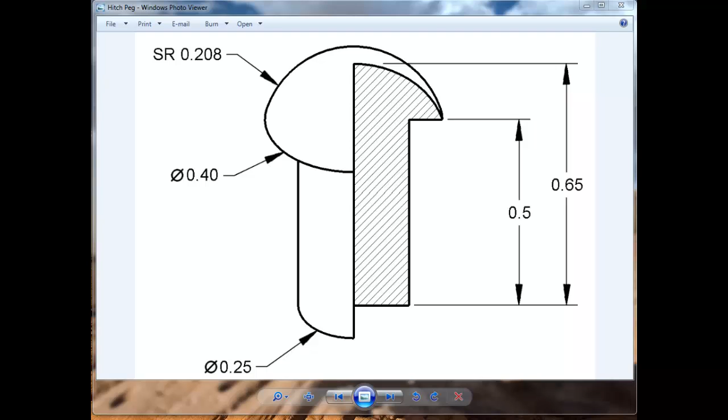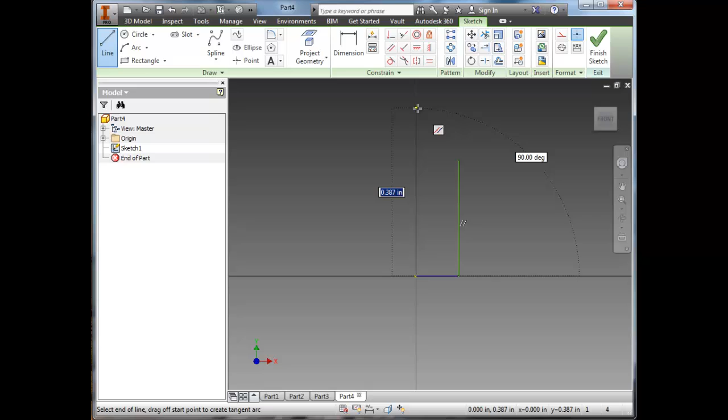The way I'm going to make this is just filling in the information that I do have. So I'm going to go into Inventor. Oh, got to make a new one. And I'll create a new sketch on one of the sides. It doesn't really matter which one because it's going to be round. And I'm going to fill in the information that I do know, which isn't that much. I know that there's some shape like that.

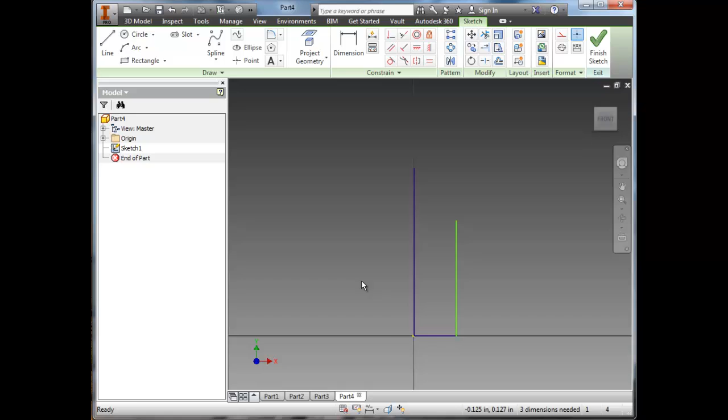I'm told that it's 0.5. These measurements, any height measurements won't be halved, but I have to only take half of this bottom diameter because I'm only drawing half of that circle and also of this one. So I have, at the bottom, I'm going to do 0.25 divided by 2.

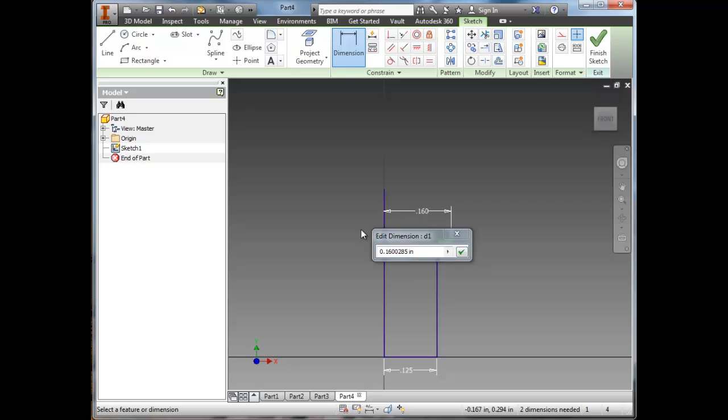And then I'm going to extend a line out here because the distance from here to here is, that's this diameter, is 0.4. So this distance should be 0.2. The height here is 0.5. And the height at the top is 0.65.

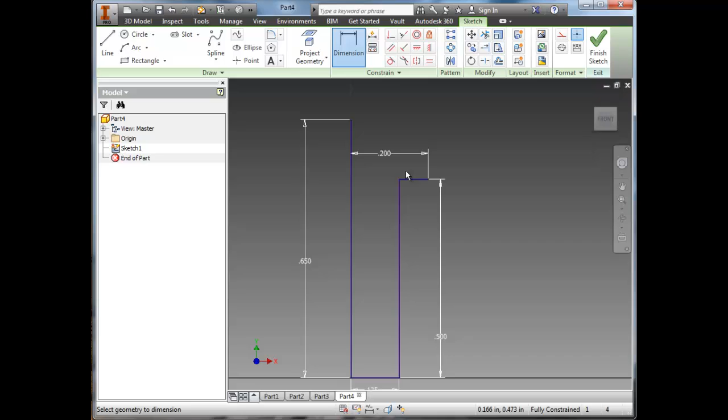So I haven't even dealt with my arc yet. I'm just trying to get all the other pieces in place. Because now I can come in with my arc tool. And then put in my spherical radius of 0.208.

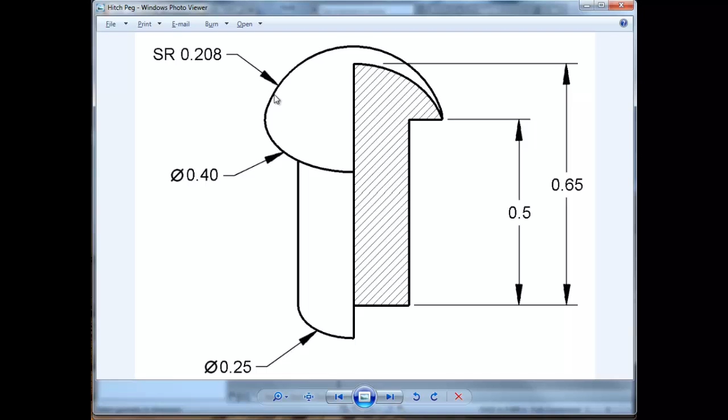And one thing that I should check, at the center, if I want to make sure that the top of these pegs is perfectly round, that means it has to be tangent to a line that's here. So I'm going to draw an extra line right there, which is super hard to see. I'm going to delete this. I have this line right here I've just added.

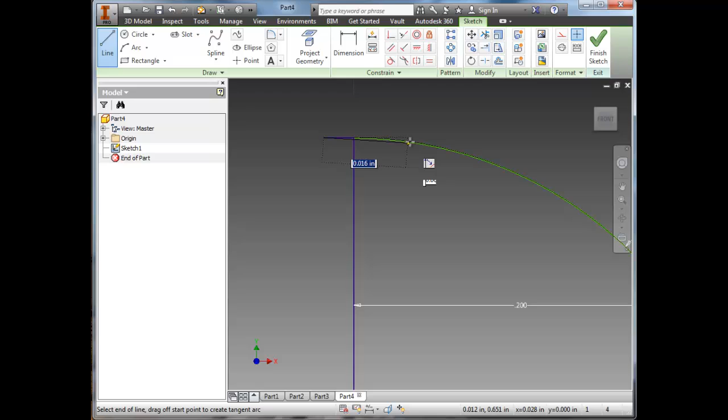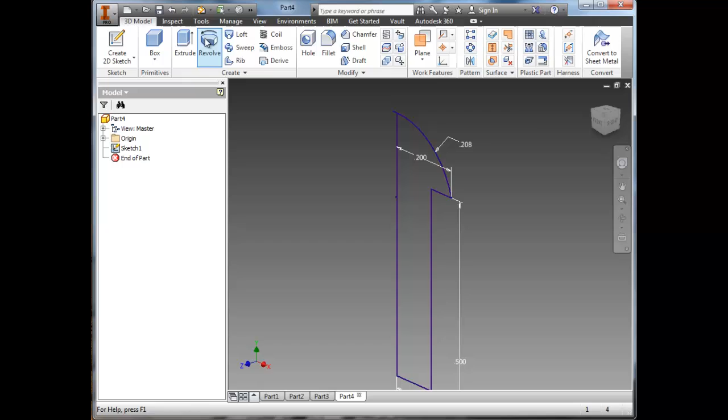So I just came here and I just drew a little line because this circle has to be tangent to this line right there at that point. So I'm going to click on tangent, make sure that that circle is tangent to that. It looks like it already is. But if it's not, I'll show you what happens. I'll finish this sketch first and revolve it around this axis and click OK.

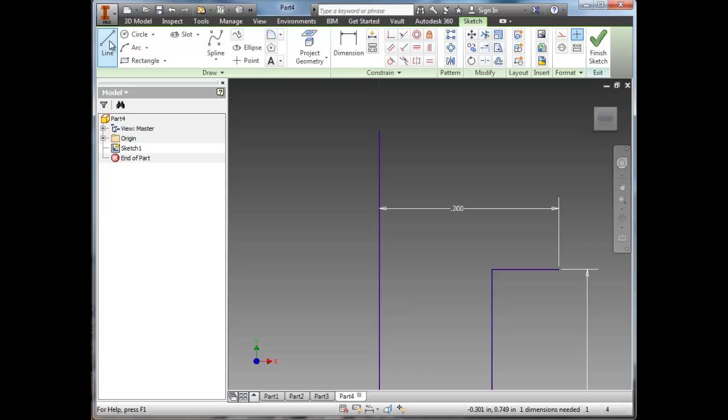And that's the peg. The reason why it has to be tangent at the top, that's what makes it perfectly round. If I go back in here and I draw an arc that is, so I'm going to draw it so it's bigger but still make it 0.208. That causes problems sometimes. In this case, it might actually be okay still. Let's see what it does.

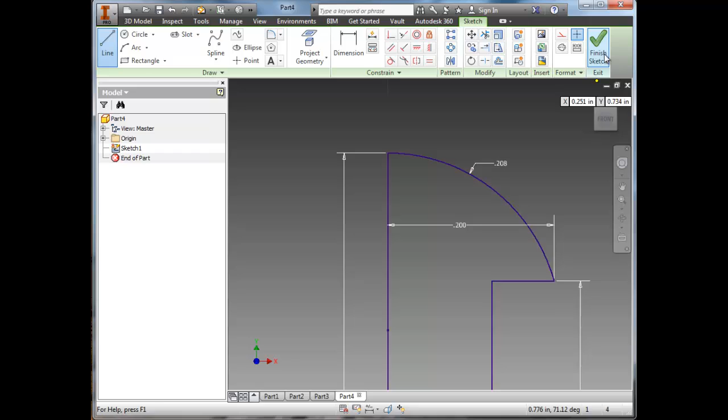Yeah, this one's set up to be tangent, but sometimes they won't be. So it's usually nice to draw that extra line and make sure that it's tangent to that edge. And then once more, I can finish the sketch.

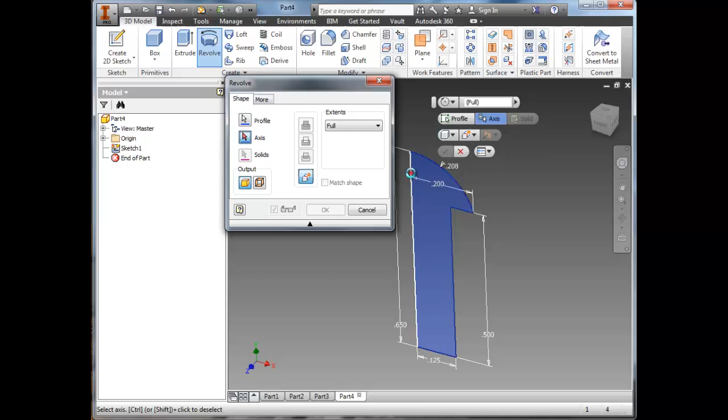Whenever I have a revolve, I just choose my revolve, and it's looking for two things. The profile, which in this case it found immediately, and then the axis, that's the line that it's going to revolve around. It's usually this flat edge. When I click OK, that's my peg, and I can save that.